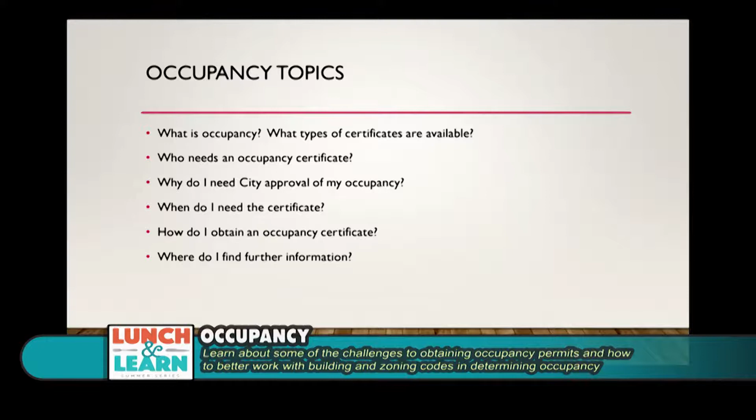Why in the world do I need the city to approve what I'm doing? Why do I have to go through a city approval process? And then, assuming I'm making it through this, when exactly do I need the certificate? If I'm looking for a business, looking at various locations, is that the right time to search this out and approach the city for a certificate? Is it before I get started? Is it once I've been there and established and I'm comfortable with my space? When exactly do I need to go through this process? And finding out that I do, and knowing when I'm going to go through this, how then and where do I go? How do I make it through the application process, any other approval processes that are out there? And finally, where can I find more information? I'll give you some of our website links, other resources to use to help clarify the process for you.

Strangely, our building code and our zoning code don't actually have a formal definition of occupancy. We have lots of language around the term. When our codes don't specifically define something, we rely on dictionary definitions. One that's out there, from Merriam-Webster's Law Dictionary, has a number of different iterations of it: fact, condition, holding, possessing, residing in or on something. The act of taking or having possession, something like abandoned property, to acquire its ownership. The fact or condition of being occupied, and finally, the use to which a property is put. Designed for industrial occupancy is their example.

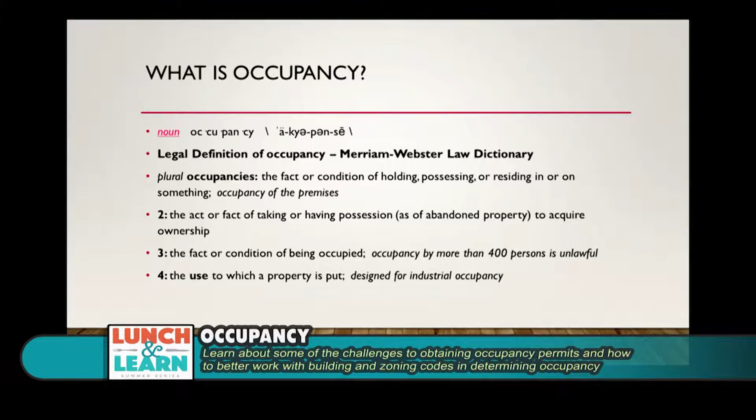Number 4 is really the one that we look at most closely: how are you going to use the space? Is this going to be a meeting room like this? Is it going to be a city hall building? Is it going to be a repair garage? What's going to happen? What functions are going to take place within that space?

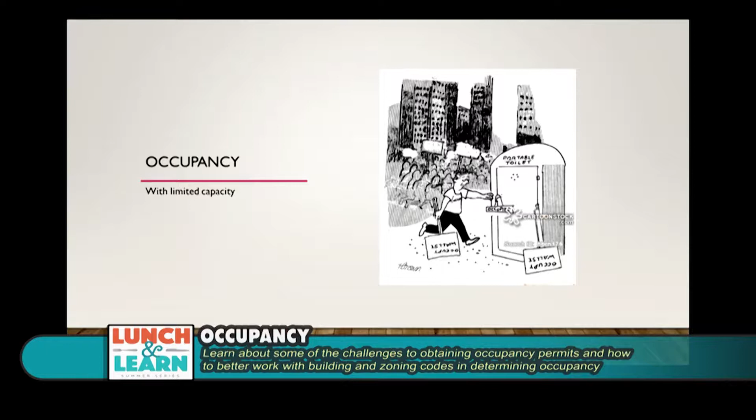A couple different versions of occupancy in this slide. This is the Occupy Wall Street movement editorial cartoon that came out, with a gentleman part of that Occupy movement going to a portable toilet, which itself was occupied. So lots of different versions and situations on that.

The building code and the zoning code both come into play on occupancies. I'll start with the building code aspect of this. The city of Milwaukee, in its own building and zoning code, adopts a couple different wider, broader codes. One of them being the Uniform Dwelling Code, published by the state of Wisconsin, which is available out there online, also in booklet format. They've gone away from some of these, but this is a set of rules that applies to your home, to a residence, to something that is primarily one or two family.

There's a couple other exceptions wrapped into this code. Portions of a bed and breakfast - you have an existing home and you want to move into different portions of it. A bed and breakfast, while it seems like a commercial enterprise, is allowed to follow some of the rules that are in 1 or 2 family home codes.

There's other uses that are somewhat similar, expanding beyond just your family being in a place - what they call a CBRF, a community-based residential facility, group homes, group foster homes for children, adult family homes. Family daycare homes are another use that can fall within the 1 and 2 family set of rules. A family daycare home is like my neighbor down the block taking care of 5 to 6 kids while they're home - it's not a daycare center, it's a family daycare home.

Then one other kind of unique situation is we have a lot of corner store buildings, mixed commercial buildings in the city of Milwaukee. Many of them were developed with a residence above a storefront - whether it was a bakery or whatever, that owner would live above the store, behind the store. The portion used just as a residence is actually subject to the rules in that 1 and 2 family building code.

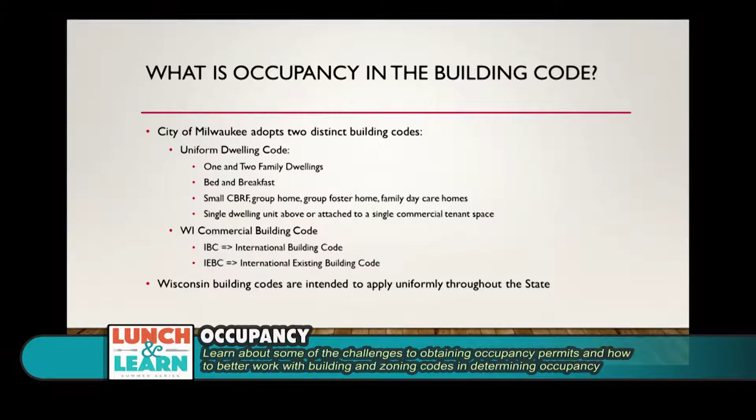These Wisconsin building codes that we adopt are intended to be uniform across the state. So if you're coming to Milwaukee to establish a small retail store, the rules from a building code perspective should be the same as you'd find in Waukesha or Sheboygan or wherever you go throughout the state. There's very, very limited exceptions to that code. Most communities - I think all communities - are subject to compliance with that. You might find people that apply it differently or interpret it differently; you're always going to run into that with any set of regulations. But the intent is to have this set of rules uniform everywhere you go in the state of Wisconsin.

In the commercial building code, we start looking at what is occupancy, what is use. The code breaks it into categories based on what's happening in the space - there's 10 different ones that they apply. Assembly is something like a nightclub, a tavern, a church, something where you have a large group of people congregating.

Business is, we're all familiar with - office buildings, et cetera. Some of the small studio type spaces can fall into this category. It's kind of a catch-all category - if you really don't fit into something else, the business type rules apply.

Educational would be schools, and some of the daycare centers that are out there. Factory and industrial, high hazard - high hazard gets into things that go boom. Generally, if you have some corrosive, some type of explosive hazard, some special fire hazard, you're going to have rules that apply to that. The residential category in this case would be multifamily buildings, some of the larger group facilities.

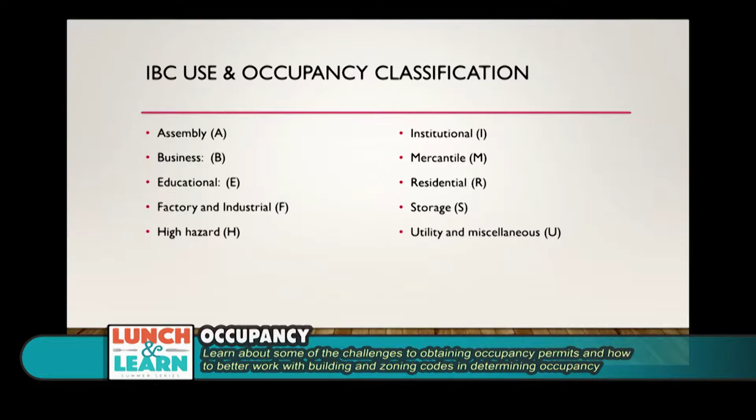So when we take a look at this, we're trying to figure out, okay, we understand what your business is going to entail - tell us your description of it. We then have to categorize it in one of these areas, and that's going to drive things forward from a building code analysis. We also have to look at the zoning code.

Occupancies have the building component, the life safety. They also have the zoning, which is really more of a planning, city development type of concern. It also ties into welfare - do we these days want to have people necessarily living next to the hazardous factory that was there as things were developed historically? There's a little bit more of a comprehensive plan these days.

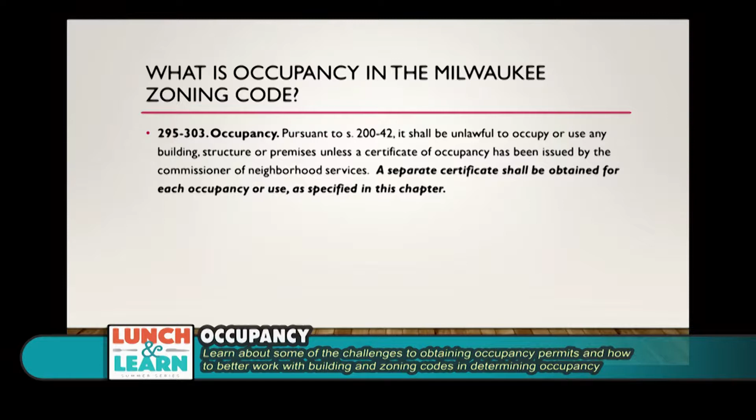Our zoning code does not define it, but it talks about it's unlawful to occupy or use any building, structure, or premise unless you have a certificate of occupancy issued by the Commissioner of Neighborhood Services. It also goes on to say that you need a separate certificate for each use or occupancy as specified in this chapter. So the zoning chapter has its own definitions separate from the building code.

So we're going to have a number of different use categories. We had about 10 in the building code. Here we have 16 different categories in the zoning code, and each of these have multiple uses within them.

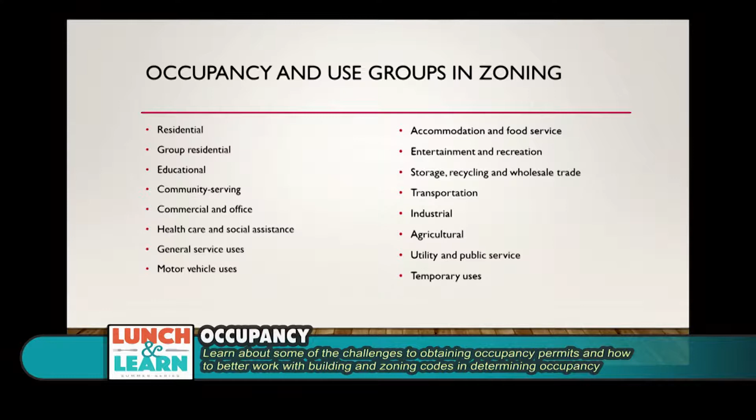So if I come in and I'm going to do a daycare center, it's going to be defined under the educational group of uses. General service uses are personal service, a tattoo shop, something where something is being performed for an individual. Motor vehicle uses include parking lots, dealerships, et cetera.

So we've got to take a look, classify it in zoning, classify it in building code. The way they classify and delineate these things is in the zoning code, you'll see a series of use tables. The plan reviewer is going to refer to these use tables.

There's a set of these developed for each type of zoning district within the code. Some areas are zoned for residential uses. Some areas are primarily commercial, industrial. Some areas are planned development, where an applicant has gone through and chosen to have a specific set of rules. So you'll start seeing those groups, the educational, and within each group, there's a breakdown of other uses.

Each of those has a specific definition. Our job is to try and pinpoint you into one of those classifications. What are you most similar to? Are you a bank or financial institution, or do you really fall into a payday loan agency? So different set of rules over the years for each of those, different permissions for them.

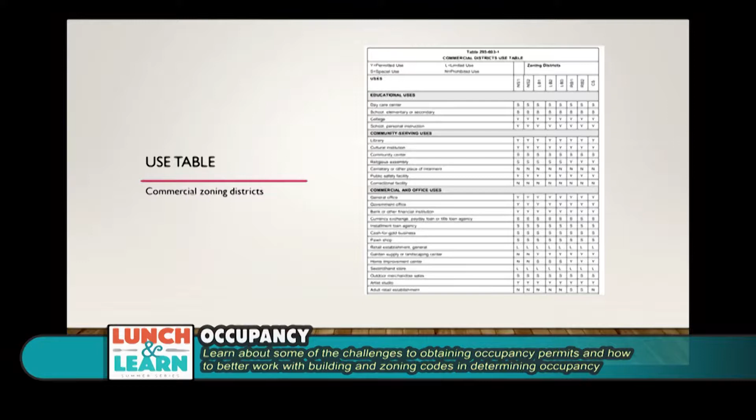This is for commercial districts, which you'll find along most of the commercial streets in Milwaukee. In commercial districts, we have, I believe, 8 different types of commercial districts, depending on when it was developed, how dense it is, what is the intended set of uses that they want to see in that area. And then we have a bunch of letters in this chart.

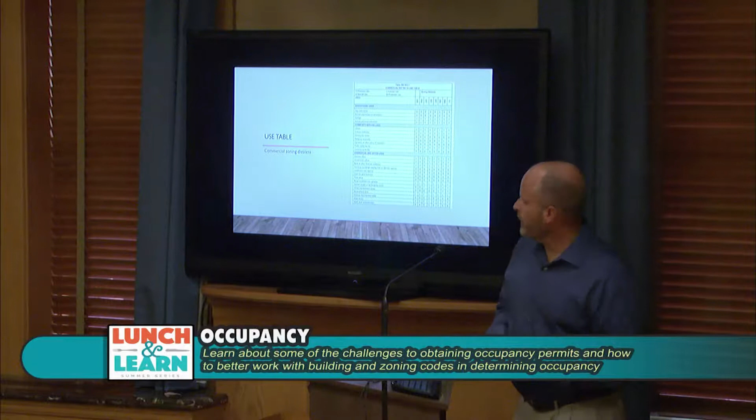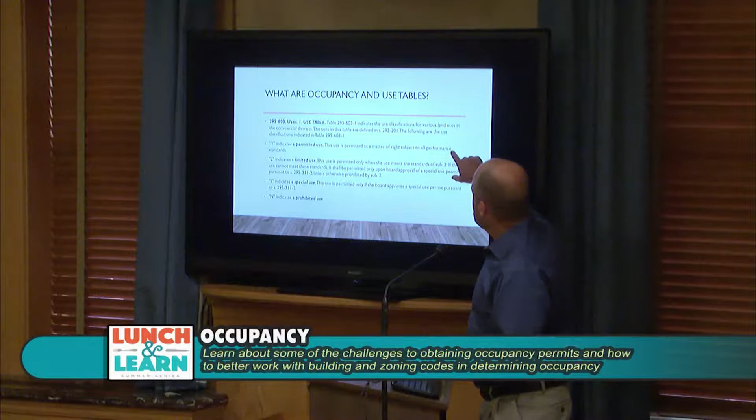The letters are key as to telling you how you're going to be able to move forward with this use in that area. What you'll see is we classify all these different uses, we define the uses, and then we have a Y, an L, an S, and an N. A Y is a great thing to see as an applicant. It's a permitted use. So if I come in and I am an office in an area that allows office, it should be a permitted use. It's a matter of right, you don't have to go through any additional zoning approvals typically.

There's another category that's the next step below as far as streamline of process, which is a limited use. So if you see an L in there, what that intends to do is direct you to a set of standards that if you meet those standards, you become a permitted use. If you do not meet them, you become either a special use or a use variance, something that needs additional scrutiny because of some impact on the neighborhood.

An example of something like that would be an hourly restriction. Say we allow restaurants in some area, more typically retail sales. It might say you can't operate between midnight and 5 in the morning or something. But if you intend to be 24 hours, not to say you can't do that, but you need to go through a process to show that that's the right fit for that neighborhood.

The special use triggers Board of Zoning processes. Basically a special use, some communities call this a conditional use. It means that generally it is acceptable, but because of some concerns potentially for the neighborhood, they want to take a look a little further, have a public hearing type of process involved. Examples of these would be repair shops, auto repair shops, motor vehicle filling stations, a lot of them that have an impact, whether it's traffic or nuisances that it generates, with littering, whatever it may be, hours, appearances, things that, okay, let's take a look, make sure this really fits with our planning.

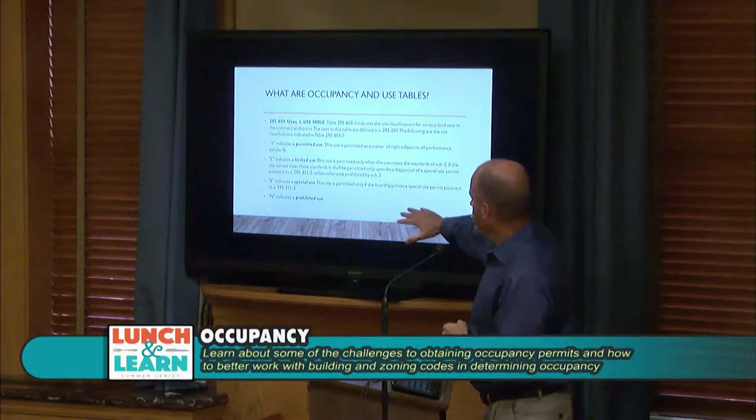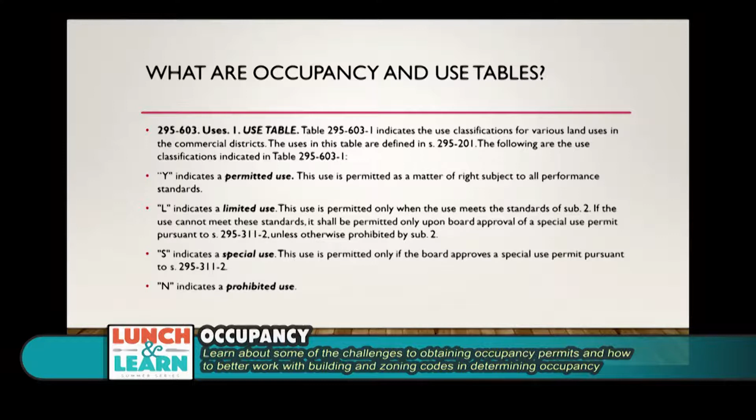And then if you run into an N in the table, that's just something that is prohibited. If you want to go to a residential district and you're going to propose a hazardous material storage facility, you're going to see a big bold N there. Last thing we want is a facility plopped down in the middle of a residential neighborhood with the special hazards that brings.

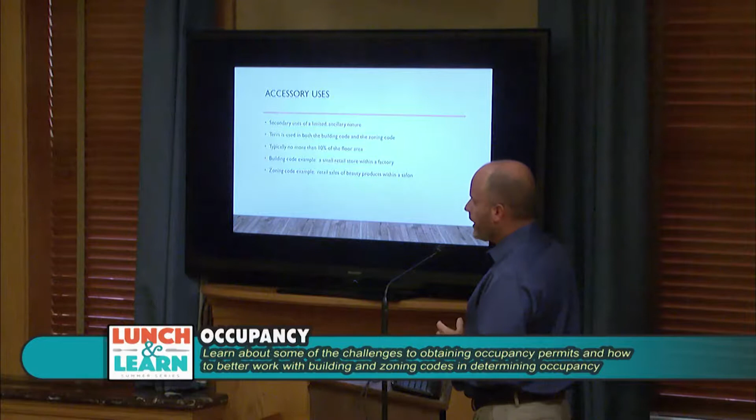There's another category of uses which are deemed accessory uses. These are typically limited, kind of an ancillary nature, something that is defined both in the building code and the zoning code. Generally, it's going to have a 10% of your floor area restriction.

If you get into the building code, you come in and say, I'm going to be a factory, I'm going to be a brewery, whatever it is, but I'm also going to have a small gift shop, a retail function. The gift shop is kind of lumped into the overall operation of the factory, so we don't have to treat it just special for this little mercantile set of rules. It's going to stay under the factory rules.

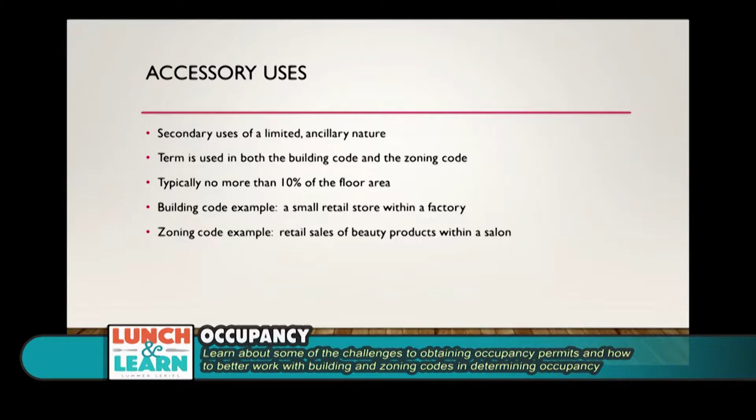In the zoning code, a very typical situation is I have a salon, which is deemed a personal service use, but I also want to sell some product there. As long as you keep that product to that 10% figure, it doesn't trigger you being analyzed as a retail use. You stay in that personal service type of use, which can be beneficial in cases there are districts that might not permit the one or need special approval for one use. But if it's just this subset of the overall use, it can be allowable.

Residential districts, there's standards, I believe, for accessory uses on vehicle repair. You can work on your own car, but don't start a shop where you're bringing everybody else's car to you. So that comes into play occasionally. We're not necessarily going to require a separate occupancy certificate for each of these uses, there are cases where some of it gets wrapped into the overall occupancy.

So now that we're down that path, what exactly is this approval of my occupancy called? You'll see a lot of terms thrown around out there. In the city, we generally say you have an occupancy certificate. Some people turn it around, certificate of occupancy. Previously, we had something called a zoning certificate, which was probably the simplest mechanism.

If I had a store, it was still going to be a store, just operated by somebody else. It was driven by the inspection process. Not much is changing. We're going to issue a certificate that says, yes, it's still permitted out there. Some communities use a zoning permit term. There are some, not necessarily in Wisconsin, but in other states that don't require an occupancy, but they might still want you to get a zoning permit. It acts very similarly to occupancy, just doesn't necessarily have the building code component of it.

People abbreviate it CO for certificate of occupancy, COO, CLO. There's different versions. There's a name change occupancy. I have Stan's shoe shop. Now it's going to be Stan's Shoes and Boots, but it's still me operating this business.

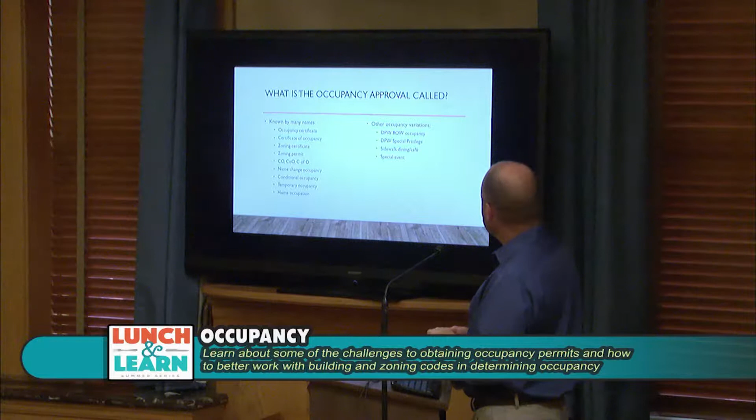And there are other agencies within the city that do their own type of occupancy. Our DPW, the Public Works Department, has occupancy for occupying a portion of the street or the sidewalk. The construction site across the way for BMO Harris blocks off a traffic lane for construction of their crane. They need an occupancy permit from DPW to do that short-term occupancy of the traffic lane.

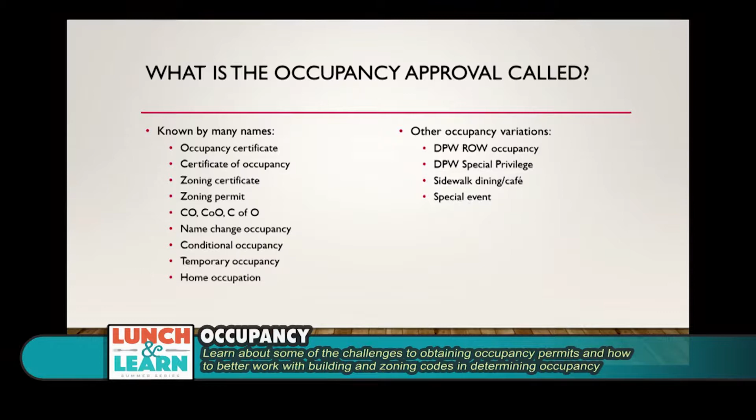Public Works also has what's known as a special privilege, which is kind of a long-term version of an occupancy. If you start your business and you find out that, or you just desire to put a ramp in for accessibility, but you don't have room on your own property, there are circumstances that may allow you to put that ramp into the sidewalk area, possibly. But if it exceeds certain limits, then DPW has this long-term approval called a special privilege to allow that to be there.

Sidewalk dining, sidewalk cafes, that's very popular these days. The restaurants want to have some seating out on the sidewalk area, which is actually public land. They do a seasonal permit through that. It ties closely with the occupancy, but it's a different beast. And then there's special events.

Harley coming into town, they may block off some streets, et cetera, and want approval to do some of that.

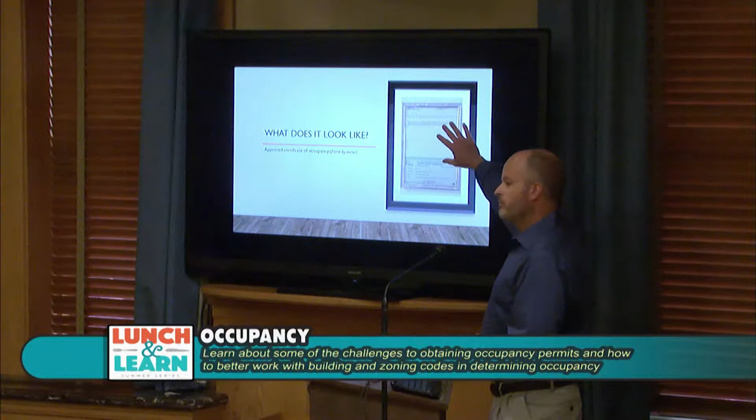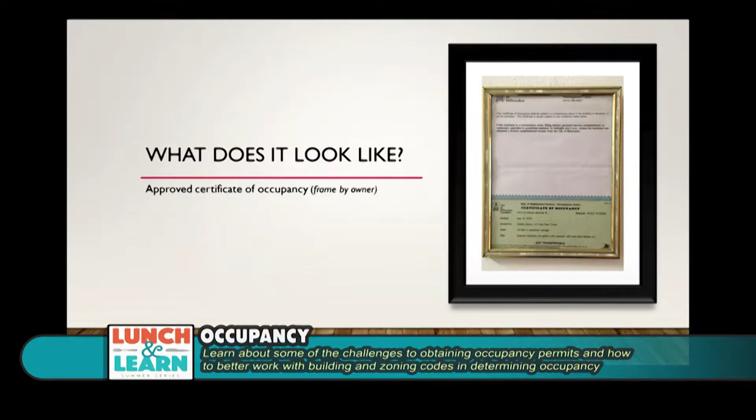What does an occupancy look like itself? This is generally what you get at the end of the process. Everything's been approved. We produce a green background sheet that has some standard language on it, and then gets into the date it was issued, who it was issued to, what use this was, and what part of the property or building you're being approved for. This frame was done by the owner. We don't provide the frame for you, but we'll get you the certificate.

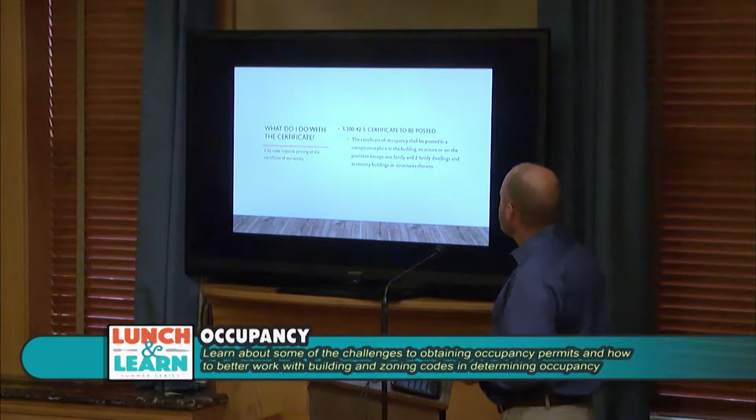So now I've got my certificate. What exactly do I do with this thing? City code does require you to post it. There are some uses where that's not feasible. Generally, maybe a transmission tower, an outdoor storage use that you really don't have a building there or something. We don't ask you that you put it on the fence. It should be at an office somewhere related to that. So fire inspectors will look for that. Other people may be looking for that occupancy.

The general ordinance is posted somewhere in the building. You'll see them sometimes behind the counter. You walk into a restaurant, whatever. They've got a lot of different placards up there and notices. One of them is often the occupancy certificate.

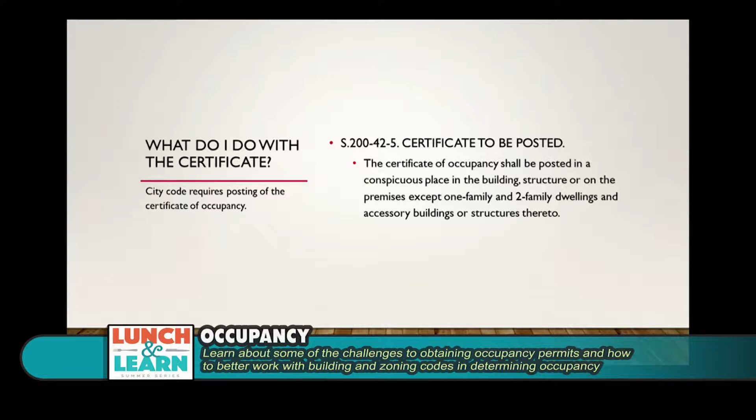Note that we don't require occupancies for 1- and 2-family dwellings, again, with the exception of some of those special uses. So for your home, if you move out, we don't require a formal occupancy. There are communities that do. Milwaukee has not been one of them. And that extends to if you build a new home, you find a piece of land, I want to build a new one-family, two-family. The city has not required an occupancy certificate in those scenarios. You just get your inspections based on your permits. They will finalize those permits for you, and you should be good to go.

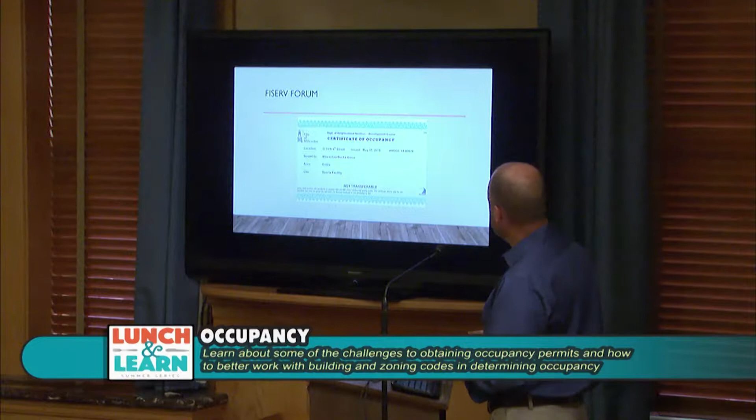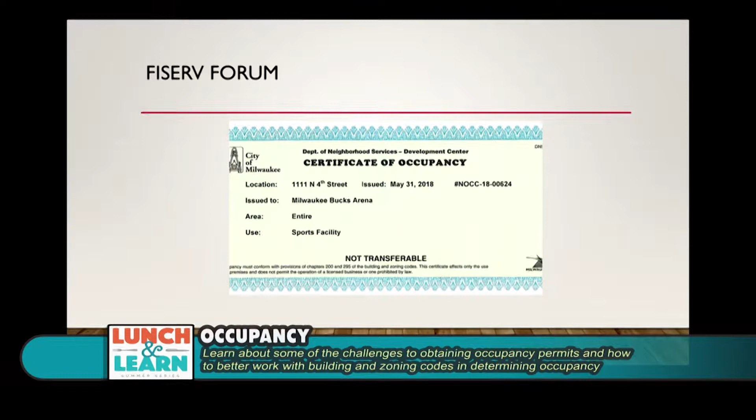A couple examples of some of the ones that have been issued. This was for the new Bucks Arena, the Fiserv Forum. This is a portion of it. Same information. They had partial occupancies on the way through to get them going on places in it, but somewhere in that facility should be this certificate posted on the wall.

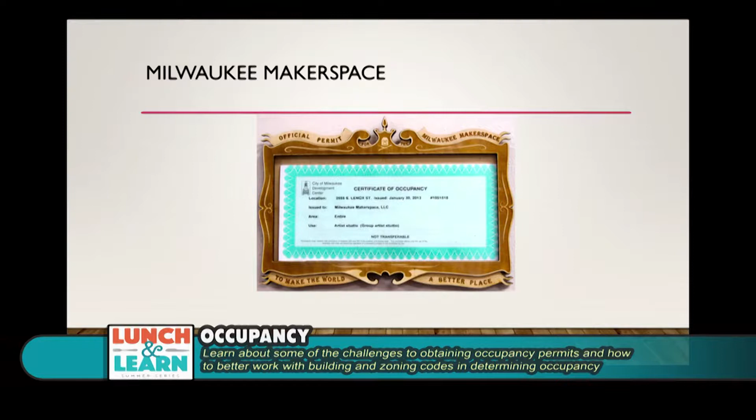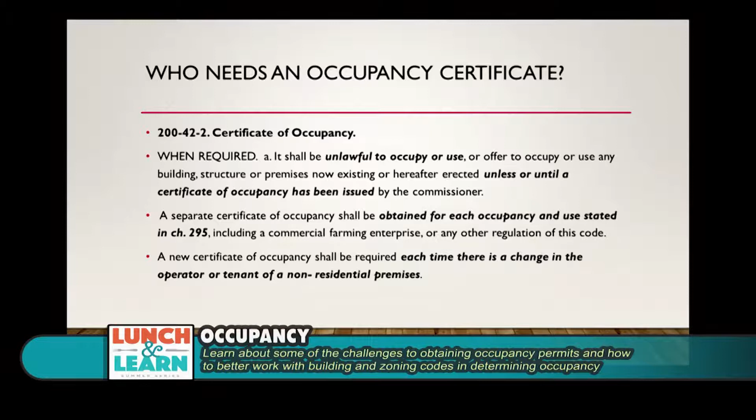Now we get into, well, we know about an occupancy certificate. Who exactly needs one? City code gets very specific, as it usually does. It says it's unlawful to occupy or use or offer to occupy or use any building now existing, hereafter erected, unless or until a certificate has been issued by the commissioner. It gets into that language again about for each use stated in the code, and it extends to things like commercial farming enterprises and other regulations of this code. Commercial farming is a more recent addition to our zoning codes, which is why I think it got called out in that section. And each time there's a change in the operator or a tenant of a non-residential premise, this is probably the most common one we run into. Somebody's going to take over a business location, a tenant suite, whatever it may be. So the bulk of our applications would be for a new operator within an existing space.

Sometimes you'll have uses that tie into this use table and talk about a new certificate for each use. We do have plenty of multiple use type of occupancies. One example is a motor vehicle dealership. You've got defined uses of motor vehicle sales, you've got motor vehicle service, and motor vehicle body work, which are all different categories in that zoning code. We're not going to issue a different certificate, but what we do in those cases is we classify each of those and put it in the description, like Joe's car dealership with sales, service, and whatever other functions they may be.

Churches often have multiple uses within them. We've got the traditional assembly space. Many of them have a school associated with the church, and they also get into other community serving functions such as food pantries and those type of activities.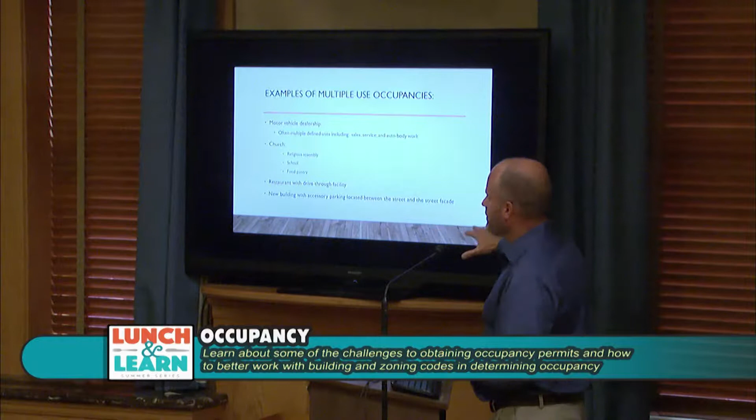Restaurants - now, a restaurant often has a drive-through facility. You wouldn't think of a drive-through facility necessarily as a use, but the city has defined it as a separate use. So we want to make sure that that's identified as part of the application process. And if you get a new building, this is kind of another one of those nuances. There's one particular accessory use that's brought into the main use table, which is accessory parking lots.

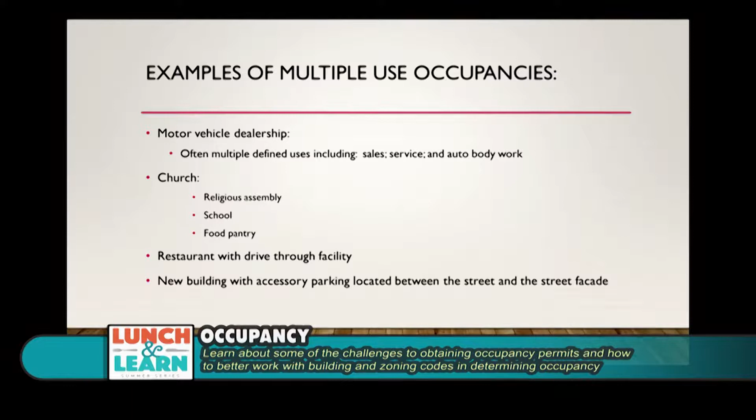You have something like parking on my site for my building. There are rules that apply where in some instances they've brought design standards saying we don't want the parking in front of the building. Most of our older commercial areas had storefronts all the way up front. If you want to put parking in front of the building in those areas, you may be able to, but it's a Board of Zoning process.

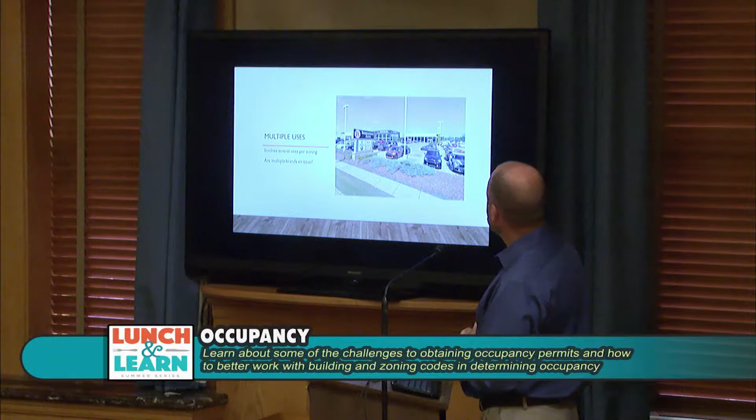This is one of those dealerships that has multiple uses in it. They have different sales rooms, service functions, service bays. This particular one is operated by one group, and they have multiple brands - Audi, BMW, and other functions like that.

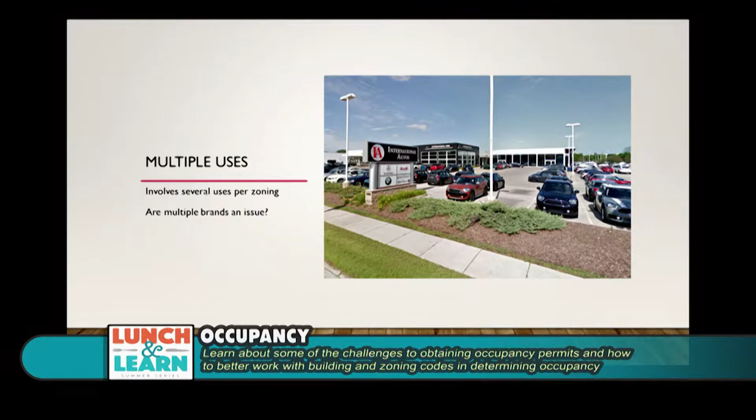So do I need a different occupancy for each of my brands? No, that's not the case. Occupancy is really tied to whoever's operating. If they have one LLC, one organization operating the whole thing, one occupancy will suffice. If they had different ownership structures, then that triggers separate occupancies.

So boiling it down a bit, when you establish your business, church, agency, or school in a new or existing building, you need a certificate of occupancy before you open your doors. They're also required for some things you might not be aware of, such as parking lots, outdoor uses - I have an outdoor storage lot - or commercial storage buildings, like putting up a new large shed behind my factory or my store. That requires an occupancy when it's all said and done.

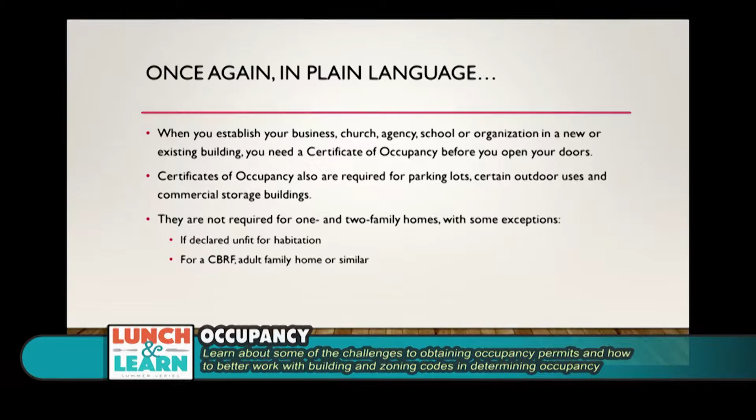On 1 and 2 family homes, we're not requiring it unless it's been declared unfit for habitation and vacant for some length of time, with orders to fix issues. We don't want somebody getting in there and starting up again while the plumbing's not working, et cetera. And those small uses wrapped within that code - the CBRF, the adult family homes.

So all through that, we've figured out when we need that. Why exactly do I need it?

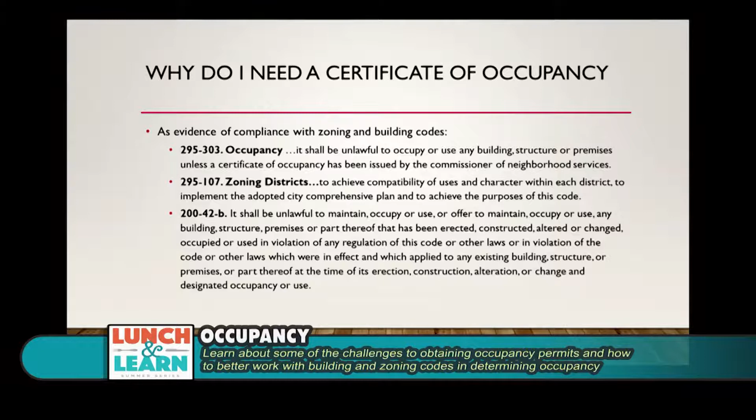It comes down to basically showing compliance with zoning and building code. We've discussed zoning a bit, the regulations in place, the building code impact on it. Really, the certificate is your proof that I'm good to go - this thing meets those rules. There's specific language to that effect in there.

When exactly do I need the certificate? Before you begin operating your business or enterprise. If you've constructed a new building or addition, at the end of that process you'll need a certificate. If you're moving your business into a new space or building, or expanding beyond the area you currently occupy - say I have the first floor of this building and I'm going to bring my function up to the second floor where I was not in control or operating within that space - you need to revise your occupancy to reflect that.

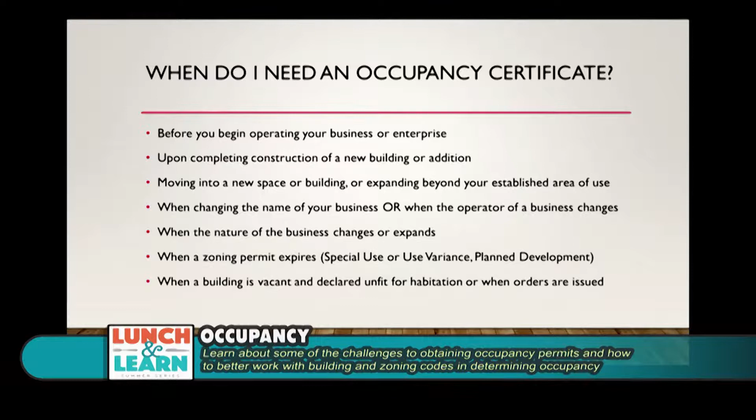Outdoor storage lots and outdoor functions often are the ones of main concern. They start acquiring adjacent property, wanting to move the scrapping operation, the storage operation, whatever it may be. So just know that if you change your plan, you need to come back and amend your occupancy.

If you change the name of your business, or when the operator changes - if someone sells to somebody else but they're going to operate the business the same way, the new owner needs it. If I just decide to change the actual name on the outside, but I'm still the owner, still the same function, there's a simplified name change occupancy that captures that.

If you have a special approval, a zoning permit through our Board of Zoning Appeals or through a planned development, they will put expiration dates on those. Lots and lots of daycares have sprouted up in the city, and most of them have to go through the Board of Zoning for a special use permit. They will grant 1 year, 3 year, 5 year approvals, sometimes longer. At the end of that time period, they'll send a letter saying your approval has expired, which makes your occupancy null and void.

So you have to start the process again with an occupancy application, get a new certificate, and renew that zoning approval associated with it. And again, the unfit for habitation type of scenario out there.

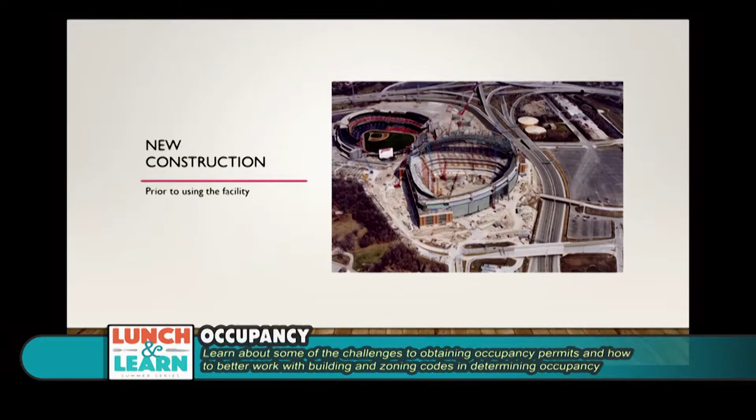Moving to a new location, a new store coming soon - we're all pretty familiar with that scenario. The name change - a good local example was Alterra selling their naming rights and becoming Colectivo.

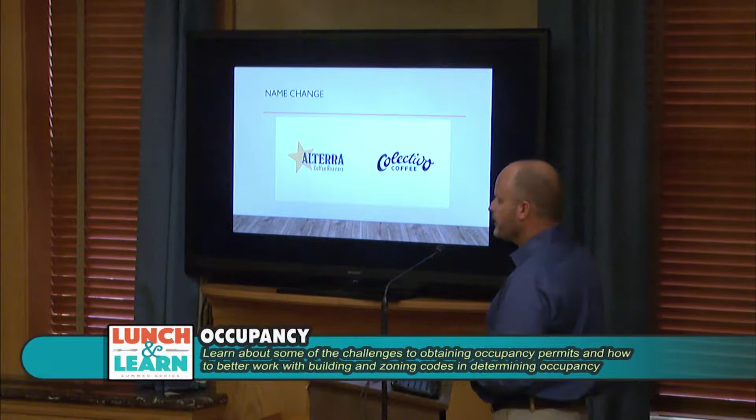So each of their locations should add an updated occupancy to reflect that. This one can get a little interesting if you have a business that has other licenses. Restaurants typically have to have a food license.

Taverns, those type of things have a liquor license. And you need to coordinate whatever is put on those other applications with what's going to be on your occupancy. So if you operate with an LLC, you want to make sure that exact description is also on your occupancy here.

And it can extend to changing basically your branding on it. So just be aware if you have some of those that have multiple licenses, multiple approvals, that there's some coordination involved on those.

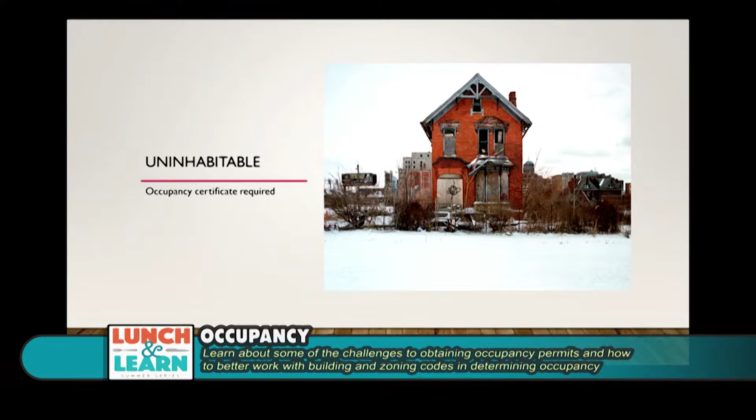Circumstances do arise when people wonder, can I get in there before I have an occupancy? Those are those couple that we discussed early on, the temporary occupancy permit and a conditional occupancy certificate. They're similar but different - one of them deals basically with building code.

So if I have a temporary situation that I'm going to ask for - if I'm building the new arena for the Bucks and we're complete to the point that we're just finishing up some measures in there that are not deemed to be a special life safety hazard of some sort - we can give some approvals through the inspection process, through the commissioner's office, to get you established functioning for a portion of the building while you finish up others.

It's fairly common in some of the multifamily buildings, especially when it was condos, that they would look for approval on the common use spaces - the parking lots, maybe a floor or two that were ready to go - while some upper floors were being worked on.

We've also had some large restaurants - they're going to bring their staff in and do their training ahead of time. Not quite a soft opening, but let's get people familiar with this. And really to have those functions going on, you need an occupancy. It might not be fully ready, so we'll give you a temporary out there to do that type of training work. Again, this goes through the commissioner's office over at Neighborhood Services.

They'll take a look based on inspector feedback as to the status of the building and either deny or approve that for you.

Conditional occupancy works in somewhat of a similar manner. This comes into play when you have some other agencies, typically Board of Zoning Appeals. So if you've been told that you have to go through a special use process, that takes some time. If this thing is going smoothly, you've completed your application, the building meets code, you don't have building code situations to deal with, violations out there.

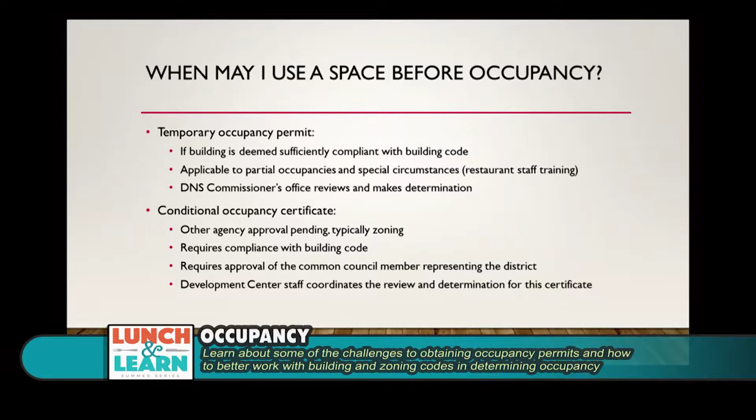Now it's just a timing matter. And if the aldermanic office supports it as a representative of the neighborhood, they can consider and potentially grant approval to get in there before that hearing date - that might still be a month out. So it's a nice tool to have out there.

It does require some effort, requires support of the neighborhood through the alderman's office, and that's issued through the development center. You have to have everything working through the occupancy process, the building inspections done, and any repairs completed, but it's a mechanism we can offer to save you some time.

So all that said and done, we're up to the point where, okay, I know I need one - how do I get one of these certificates? There's applications that can be made either online, or you can come and do these in person.

Our land management system is out there. It needs some refinement yet, but we have a tool out there to create an occupancy application. That application is not automatically processed - it goes to somebody like Alex to review that application. It does require, I believe, that you create a user account like most other websites, name and password.

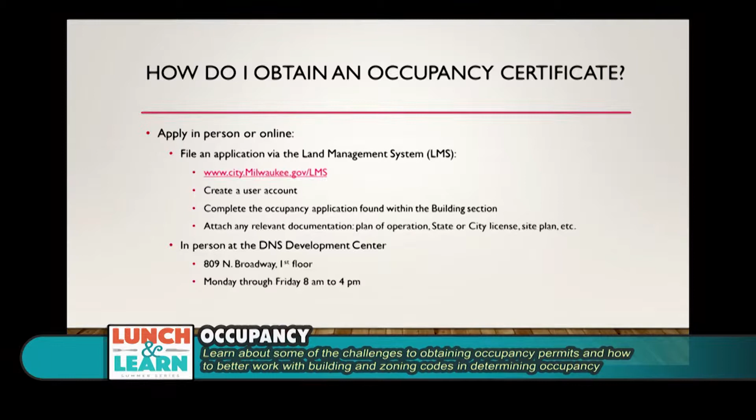Complete the information that's asked for. Anything extra that you can provide to help me or my coworkers understand what you're trying to do at that site, such as a site plan or a plan of operation, a description that tells us exactly what type of business you're going to have. It's helpful. You can attach that documentation to the record, and it'll all be there for us to take a look at.

Or if you come in person, the development center, if you're not aware, is at the 809 North Broadway building, east of City Hall. We're on the first floor, open Monday through Friday, 8 to 4. You can come in person, it's a first come, first served basis, but you can meet with a plan reviewer and submit your application in person. It can be helpful if you have something with some complexity to it. If you have other approval processes, we can steer you through that process in person.

To expedite this review process, information is key. Even as simple as knowing the address of the site. We've had people confused, they weren't sure, it wasn't on the building, the owner wasn't being clear. As much as you can do to define where this business is going to be, where in the building it's going to be - first floor east, tenant space 6, whatever it may be. Keep in mind we have to have this clear so that for record purposes, if we're researching this five years down the line, we know this business was in this location and it can continue that way, or we never have any record of one being established. It'll help you out long term.

Square footage can be helpful. That's mainly a driver of the fees if inspections are required, but know how much space you're leasing, for instance.

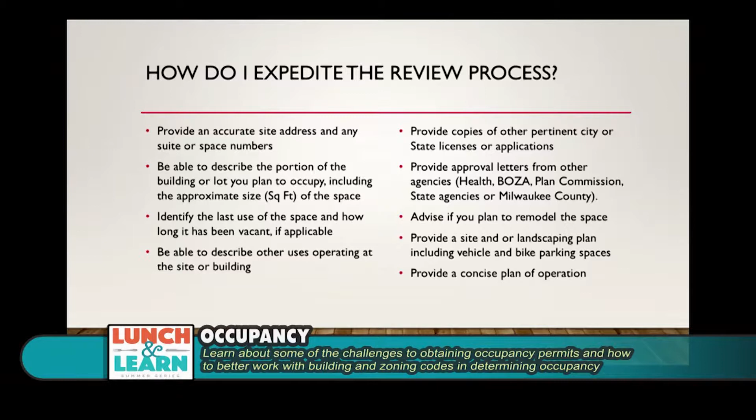We ask if you're going to remodel the space. Most people, when they come in, may just be accepting it as is, but there may be times you want to make improvements. The reason we ask is we want to help you understand what other permits you might need. If you know you're going to put up a couple of walls and create a new toilet room or something, we can step you through the process to obtain those permits, because the last thing we want is for you to get out there with the occupancy, you've done some work, and the inspector stops everything and says, nope, you need a permit at this point. So we're just trying to help you through the various processes.

Site and landscaping plans are probably getting to be a little more key than they had been. Our bike ordinance was revised in the last year, I believe, and has much more stringent requirements that apply to provision of bike spaces, even when you change an operator of a space at times. So if I'm coming in and taking over a business, there may be times I have to prove that I have so many bike spaces available. Now they can be spaces out on the sidewalk with a hoop - there's different ways of complying with that. But bike parking has become a much greater part of this whole thing.

So owners often have site plans. Parking is a concern for motor vehicles too - how many spaces are available? Do you have street spaces available out front?

The reason we're asking all that is primarily for parking needs, and then a concise plan of operation.

Retail sales of shoes is a pretty simple one, you don't have to work up a whole plan of operation on that. But if you have something that's maybe in the gray areas, is unique—we seem to be getting a lot of those these days—if you can put in writing what you plan to do in that space, what activities are going to take place, I'll show you a link to a form that steps you through what should be on a plan of operation. It's just a tool to inform us of what you have in mind with your business. You've been developing this for a long time or a short time, you have a pretty good idea, but there are times we need something in writing to clarify that.

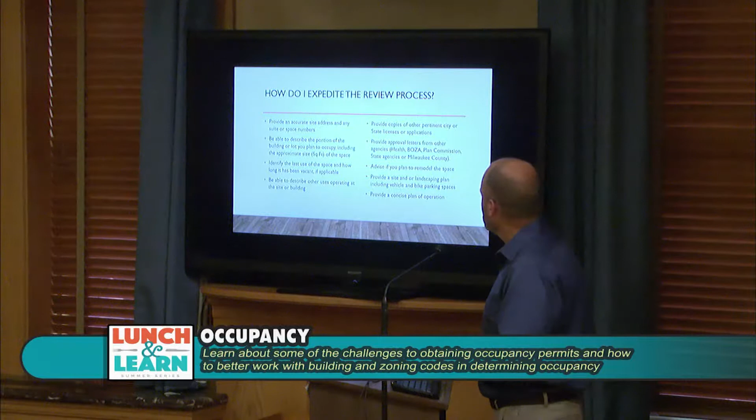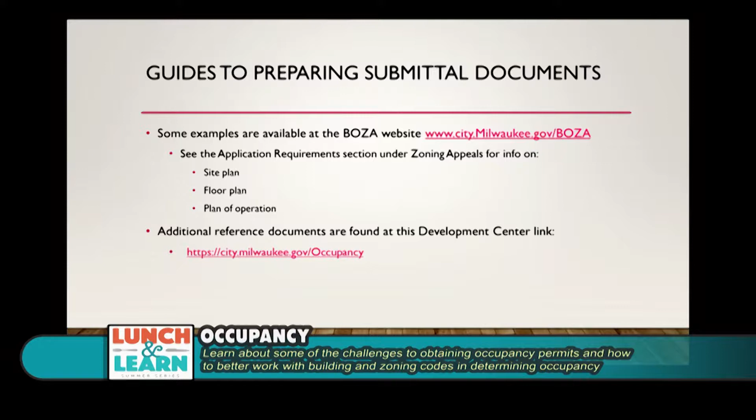As I mentioned, the BOZA website is one link. I believe this will be available on the website so people can access some of this information—what is proper for a site plan, perhaps a floor plan, a plan of operation. Our development center link also has some information sheets on the occupancy process that'll be helpful for you.

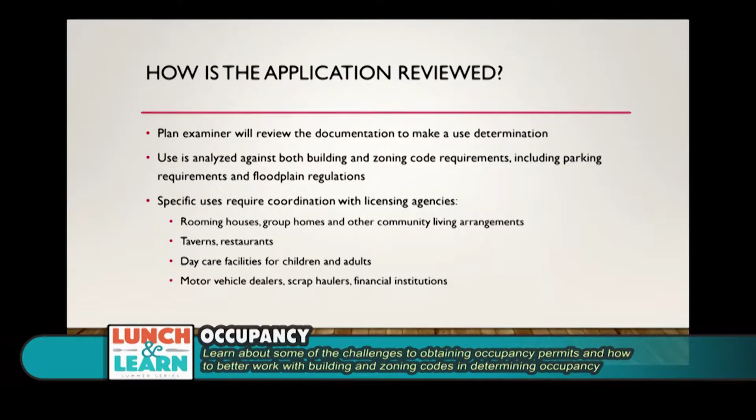What happens once I present all that information? You meet with that plan examiner, or the plan examiner will take a look at your file out there, try to classify it from a use standpoint against both building and zoning. We've got to take a look at the parking requirements in the code. Sometimes you run into floodplain situations if the property's in a floodplain. Other uses require coordination with other agencies. So we're going to look for that type of information, make sure that's in place—daycares, taverns, restaurants.

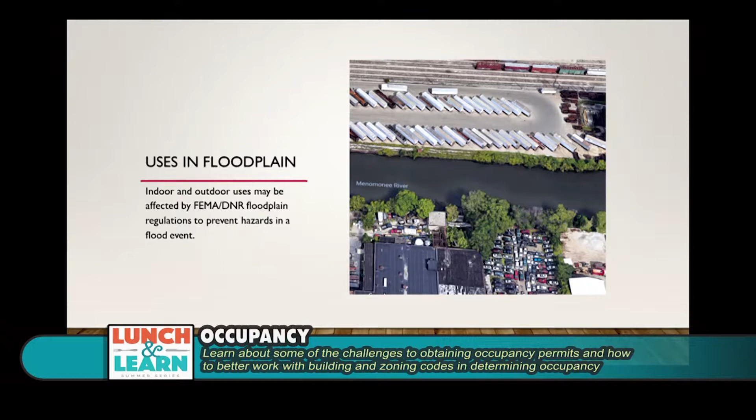Uses in a floodplain, thankfully, occur very rarely. Here you can see this isn't necessarily a floodplain in the valley on this canal, but we have some outdoor storage—a bunch of vehicles stored. There are regulations through DNR and FEMA that limit what you can do in these areas to prevent things like this from happening if we get a flood event. So outdoor storage in particular—we don't want hazardous materials that might wash down the floodway, and we don't want things that are going to hit a bridge and obstruct and create an even worse situation.

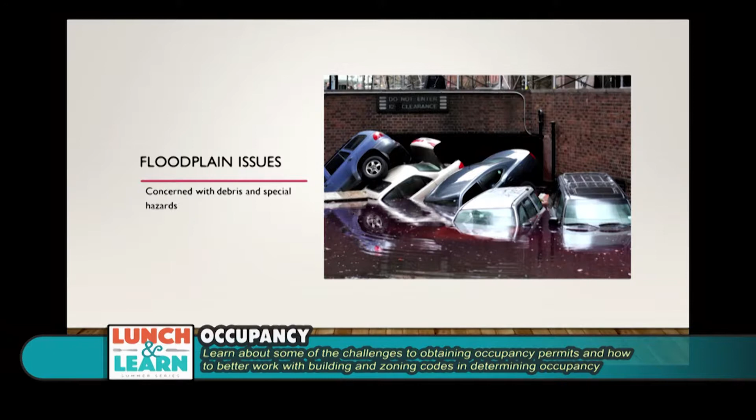This can be a little tricky. There's not too many areas—there's a couple up by Miller Valley where some buildings are out there that we've had become a problem, where somebody wanted to come in and use the space in a way that wouldn't work.

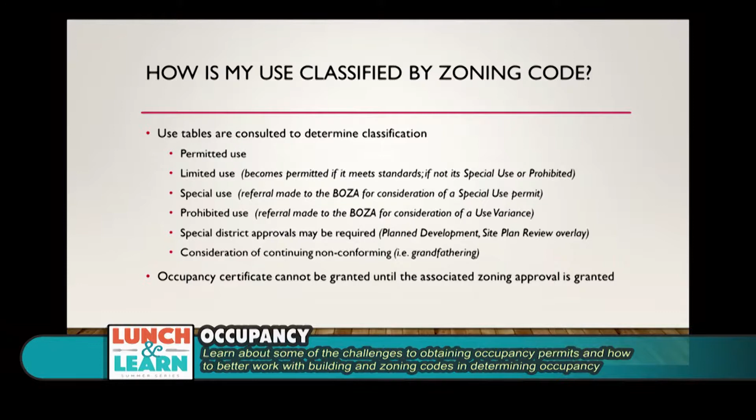We go back to how is this used—the plan reviewer is comparing it against which category you fall into. There's also this thing akin to grandfathering, what we call a continuing non-conforming use. That's where we need evidence of what was out there previously, how long it's been since they discontinued. So if you have something that wouldn't be permitted in those tables today, but it was established in 1953 before the rules were that way, you can continue that as a continuing non-conforming use, but we need to be able to document that. Note that you can apply for these things, but we cannot actually grant you that certificate until both the zoning and building code aspects are met.

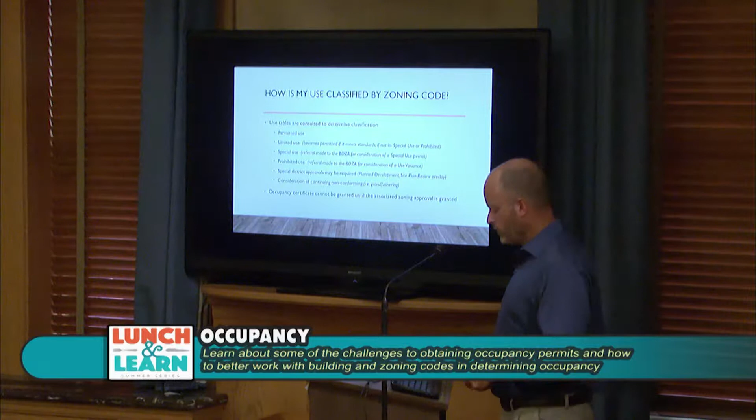On the building code portion, there are times we might ask you for more information if you have special hazards in there, like hazardous materials—how many gallons of this paint thinner, something that drives the building code into whether you're handling the property properly or not. Generally, if the building's going to be used the same way, you're not going to run into much—do I need to put a sprinkler system in? Well, not if you're going office to office typically, but if you're going retail to something that has upholstered furniture, which has a special fire hazard, there are triggers in there sometimes that'll catch you.

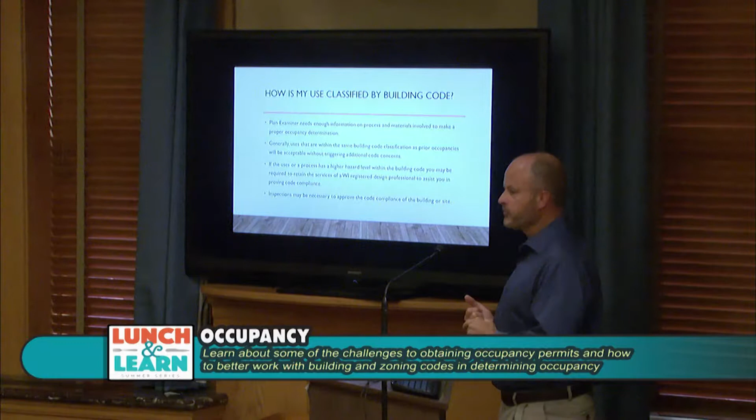The plan examiner will work with you on that, explain it for you, if you change the use to something that has special rules, such as going over a threshold for capacity that might trigger sprinklering—you go from a small cafe that's 40-some people up to a club that somehow is 100 and some people, there can be triggers that say you have to provide compliance with that. We can give you some basic information on it, but ultimately we may have to ask you to retain an architect or engineer to go out to the site, do that code analysis, bring it back to us so we can see if it's going to work or what steps or improvements you might have to take.

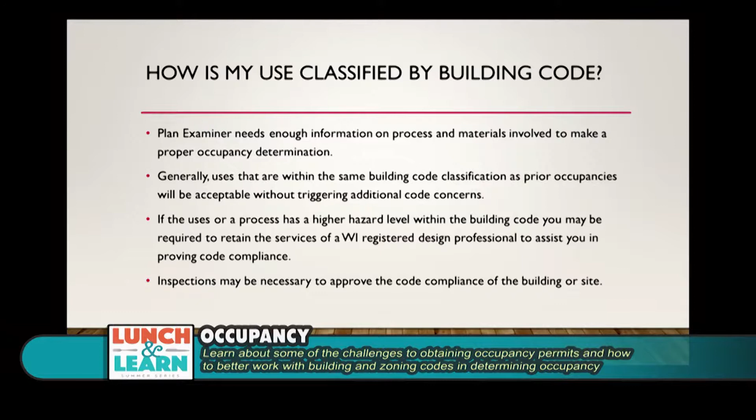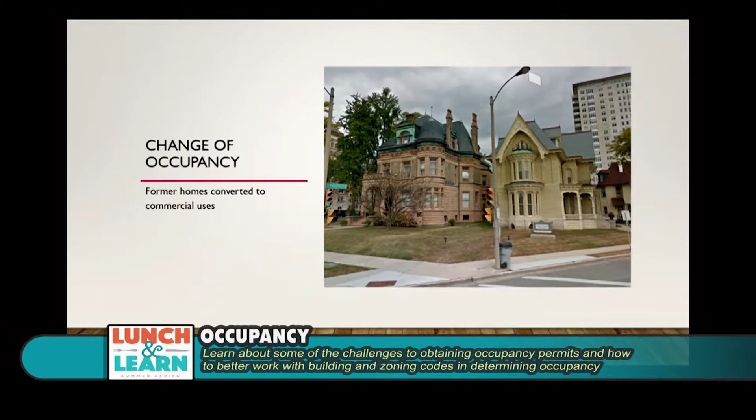And then that tags into inspections. Our inspection staff goes out on change of occupancy type of applications. These were two grand old houses that have long been offices and others. This is a little tricky today. The rules have gotten more stringent, but we have situations like this all over the city. This is that change of occupancy, how the building's being used.

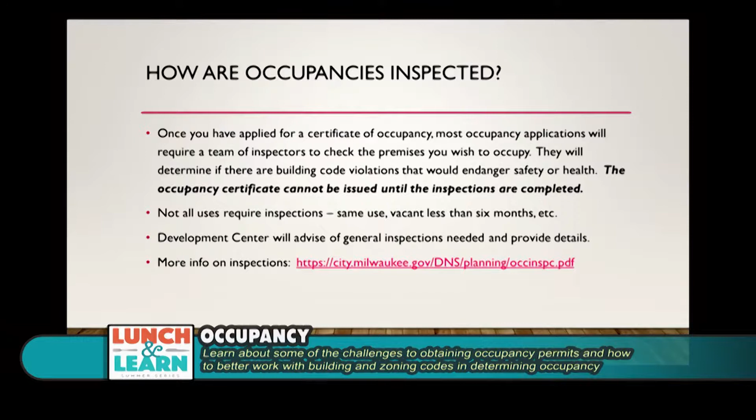Those trigger some inspections from a plumbing, electrical, elevator, or construction inspector. They're looking for basic code compliance from the building code. There are some situations, if it's continuing use, that don't require inspections. We'll let you know what that process is about, and you can also access more information on that process at the website.

Just about everything you do with the city has fees to it. Fees for the no-inspection type of things are generally in the $50 to $75 range for the application. If inspections are required, it starts at $75 and can go up to about $425 for a large facility—more often it's a little bit above $200. If you have to go through other agencies, like licensing or the Board of Zoning, they have their own fee structures and application requirements.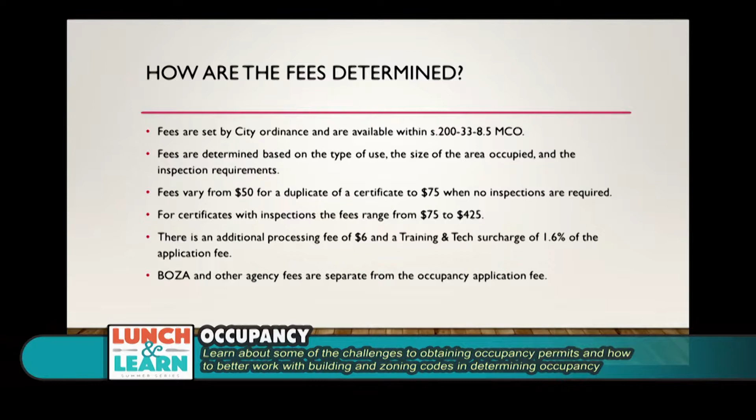If you want to do that business in your home, codes do allow some of that. We have a separate form, process, and agency that reviews that. There's a home occupation statement that goes through our fire inspection area, what they call commercial code enforcement. There's a fee charged on that, and an application is available.

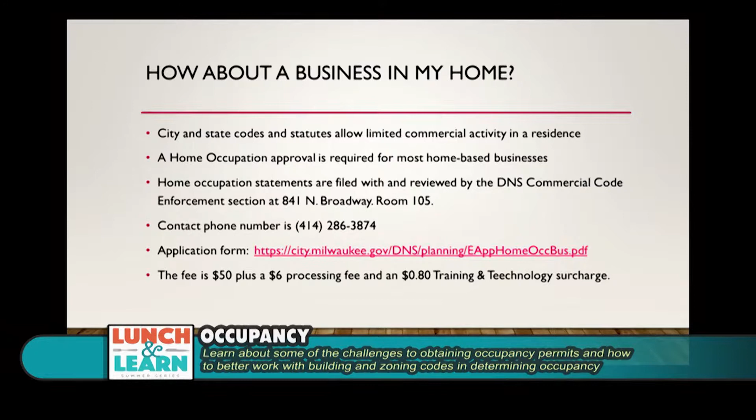Some of the scrap dealers are a good example—they'll drive around in a pickup truck, pick up scrap, appliances, and take it to the dump. They have to have a home occupation statement because most of them work out of their house. What inspectors look for is that they don't take the goods back to the house and create a junkyard in the backyard, and that they've got a legal place to park the truck. Home occupations are limited as to how many customers and employees you can have. It's really intended for doing a business in your home, not turning the whole home into an office.

Once I make it through all this, how do I get my approved certificate? Once your inspections have been done, if needed, it generally takes about three working days to get that occupancy issued. We'll mail it out to you unless we hear otherwise. They also put a copy of that online.

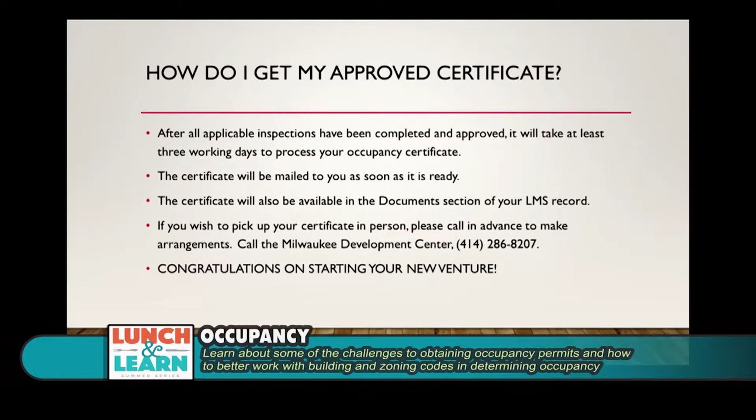If you want the online route, you can access it in that online record. You can also give us a call, or come in and pick up the certificate if you want it today as opposed to Thursday, and we'll get that to you. So congratulations, you made it—got your new venture going.

Some of the other links that are out there, I can show you examples of this. I think we'll leave some time for questions, so again this will be available for you. There's a StartSmart tool out there that's been developed to ask you a series of questions and direct you to the right approvals you need for a business process.

Licensing, whatever else—the zoning code is available online. You can find out the zoning of an address. If you're looking at a place down the block as a possible leasing point, you can pull up the zoning that's available there and look at the zoning code uses. We have those information sheets out there.

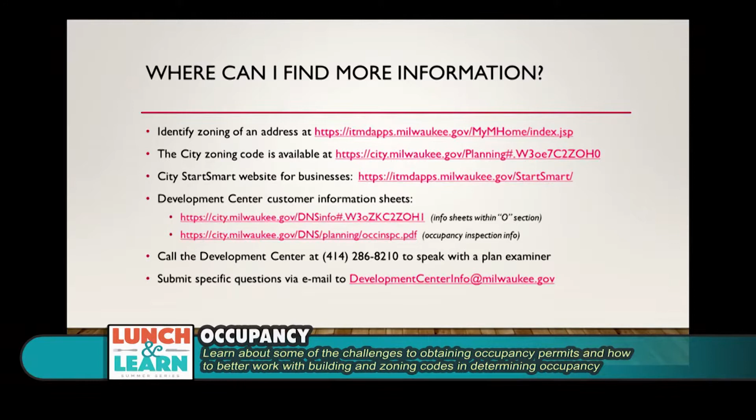We also answer our phones—you can talk to somebody in person. It may be a callback situation; they'll take a message if nobody's available, but we will get back to you to discuss some of these issues. We also have an email link that's out there.

That's everything I had at this point. So with that, we'll open it up. If you have any questions, any comments, any concerns on this, happy to respond to those.

So it sounds like ultimately the responsibility for getting the certificate of occupancy falls on the tenant, not necessarily the landlord? That is correct. I would say as an owner, though, I would take the responsibility of monitoring that.

So I manage a multi-tenant commercial office building. Okay. And I do know that when a space goes vacant and we get another tenant, we have to get a new certificate of occupancy. Mm-hmm.

On occasion we'll leave a space vacant for a while, take a look at it and say maybe if we tear down a couple walls, move a kitchen, we'll do some cleanup work. We go through the necessary permits, get the inspections, and then we get mixed reviews on whether or not we need to get an occupancy certificate. Which I don't understand why we would, because it's not being occupied, and when it will be occupied, we'll get one. So at completion of that project, you run into it where at times they're asking for occupancy at that point? Right, but there's no one occupying it, we're just cleaning it up to make it more attractive for a potential occupant.

I can see where that can happen, as the owner, to show that you have this established now as a legal space so that when your tenant does come in - if it happens to be a couple years before somebody actually comes into that, I think that would be the main concern. If it was going to be in short order, I think putting it on the tenant if the tenant is known. So it's a matter of, do we know what use is going to be in there? Have you designed it a certain way? I think that's going to stay one of those judgment call type of situations.

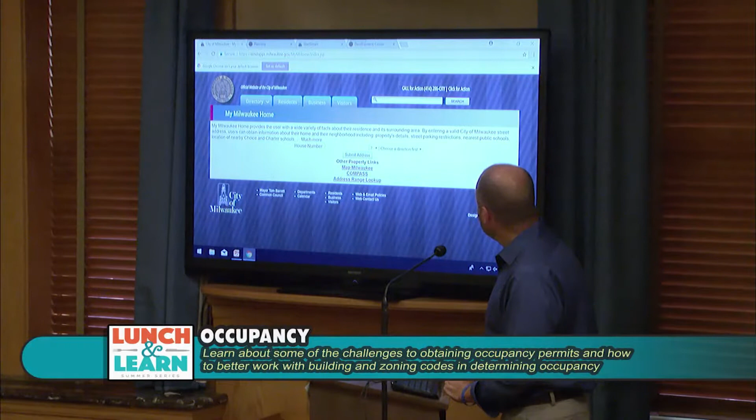I had a couple of links that might work for you on this. If you go right to the city's main page, there's this property data screen, which might be a good starting point - it's city.milwaukee.gov. You can get into this, it takes you to My Milwaukee Home, which will have links to some of the other areas that are out there.

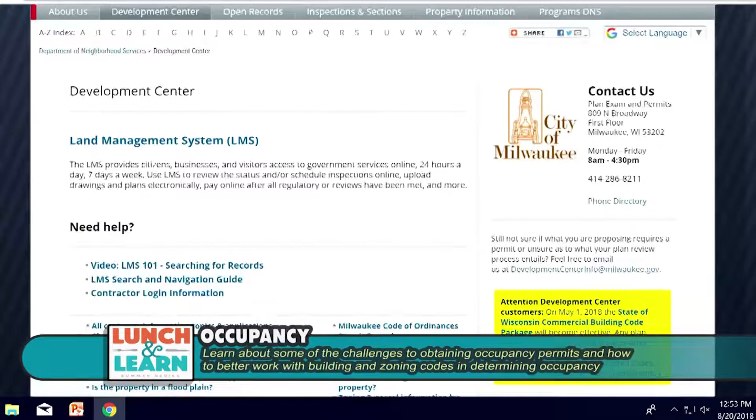The land management system will have a list of records associated with an address, and some of those records would be violations that are out there. In the worst case, you could always give us a call, but with those couple of tools - this land management system, again, this is our development center site - you don't have to be a registered user to just search information in this system. So I can go into one if I want to look up property information.

You can start by entering the address, and it'll show you records that are associated with it. There should be ORD records, which would be orders that have been issued against the property, and you can get detail within that.

And a person is going to occupy the premises that needs a certificate - how do they know what work needs to be done first in order for it to be lived in? In this situation, that order should give you a good guide on that. They're going to cite defective plumbing in the second story and those types of things, and if the inspection's required, the inspectors will also reiterate those things. They'll come out and say, well, you've got quite a few things to take care of, and give you a list of the items that need to be brought into compliance.

I wanted to follow up on her question about smaller projects, like single family - so you don't have to go through that whole process with plan examiners and all that. You know what the orders are, you hold permits, you get that done, and permits or inspections are passed, then you're pretty much done, or do you still have to go?